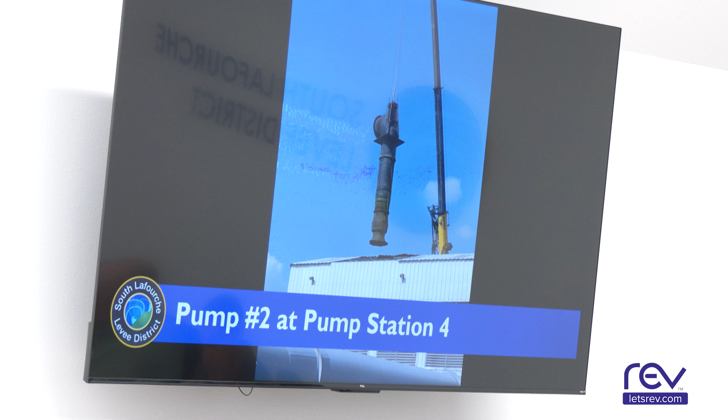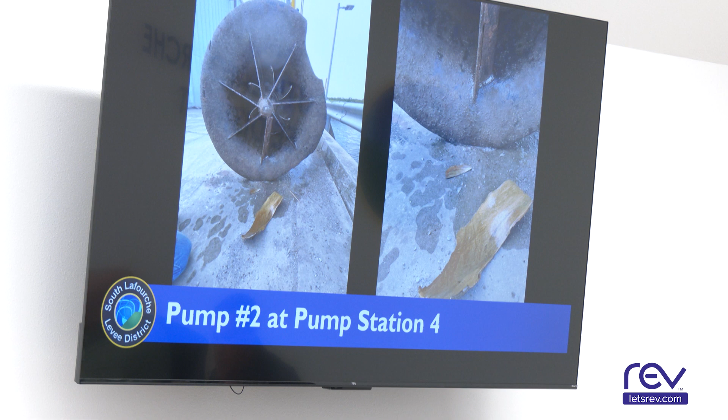All right, first up, pump number 2 at pump station number 4. At the end of October, we noticed some issues with operation at pump number 2. We pulled the pump on October 29th. You can see here it being pulled through the roof with a crane. Bolin Marine then stripped it down to assess the damage to give us a quote for the repair. That quote came back today at $216,335. You should have that quote in your packets, with an estimated time of 5 to 6 months to get it repaired and reinstalled. So that should put us right on track to have it back for hurricane season.

Part of that proposal will include creating a template for a new cast suction bowl to be stored at Bolin's shop in New Orleans for future repairs, because multiple pumps at pump station number 4 as well as pump station number 7 would all use that same mold in the future. So that'd be part of this packet. The alternative would be purchasing a new pump. Reached out to Picciola and Associates for recent quotes, and it looks like it'd be around $500,000 plus a 10 to 11 month lead time, which would put us one pump short all through hurricane season.

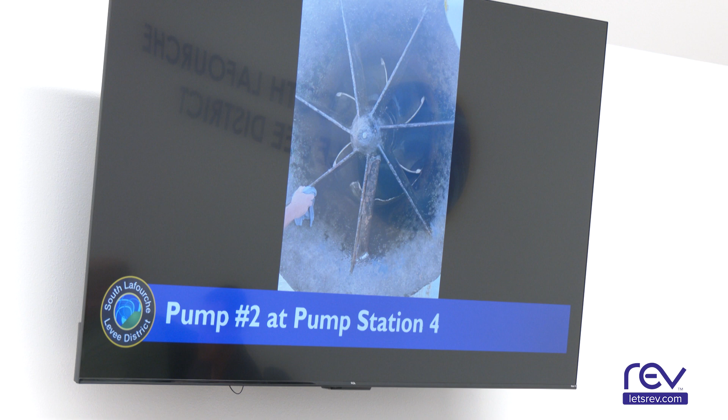So I would recommend that instead of purchasing a new pump, the board approve the cost of the repair at $216,335, since it's above my and the president's authorization to do so. Okay, you've heard the recommendation of our general manager to get the pump repaired by Bolin at a cost of $216,335. Moved by Mitch, second by Brett, all in favor? Aye. Opposed? Motion passed.

All right, next up, the semi-quantitative risk assessment. So this is part of the recertification efforts that the Corps is doing to get us back into their rehabilitation and inspection program. A team of risk analysts from the Corps of Engineers met in New Orleans from October 16th through the 23rd. This is the same team that had previously come to inspect our system in person at the end of August. So this was the next step of that process. They worked through over 30 different ways that our levees could possibly fail over that week.

That included obviously overtopping, which would be thought to be the most common. What would happen if every one of our pumps would simultaneously fail? What would happen if we'd have a barge hitting the levee? What kind of damage would that do, and would we fail in that storm? Even to, what if we had an earthquake in South Louisiana? What would that do to our levee system?

And specific anomalies to our system, like the new elevated highway going across our levee. What would happen if that bridge would collapse and fall on our levee? Now not only would that bridge have to fall on our levee, but it would also have to fall in a short enough time before a 100-year storm that we wouldn't be able to repair or put any kind of emergency protection in place.

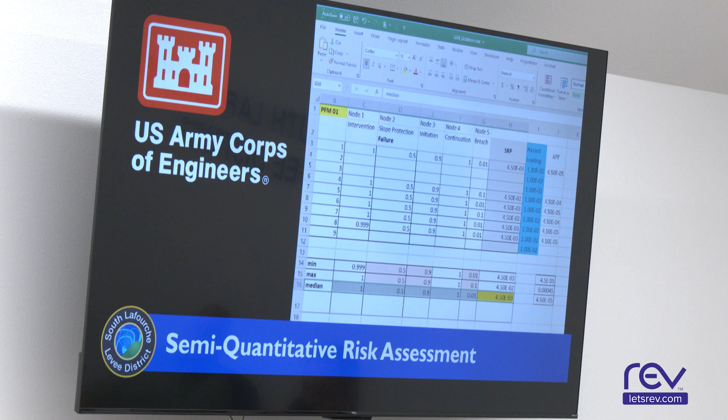All right. So next, recent rainfall and high water. So around October 30th, we started to see water getting higher in the Intracoastal with Rafael in the Gulf, and I know we saw Grand Isle had a lot of water in the area around that time. Even though it was going towards southern Mexico, we saw this earlier in June with the system that was heading towards Mexico, and we saw high water. So the water stayed high, kept climbing. Eventually we had to shut the screw gate on the culvert at the Delta Farm wall, which just caused the Delta Farm Road to flood sooner.

And that eventually led to a 1.5 to 2 foot differential between the Intracoastal and the bayou south of the Ted Gisclair floodgate in Larose. And so with that, we ended up having to go down to one opening per day, siphoning at pump station number 4 the rest of the day to keep water levels down. And we do have a video that our operations manager, Drake, took at the Larose floodgate showing the water coming through. And this was one vessel trying to get through against that 1.5 to 2 foot differential.

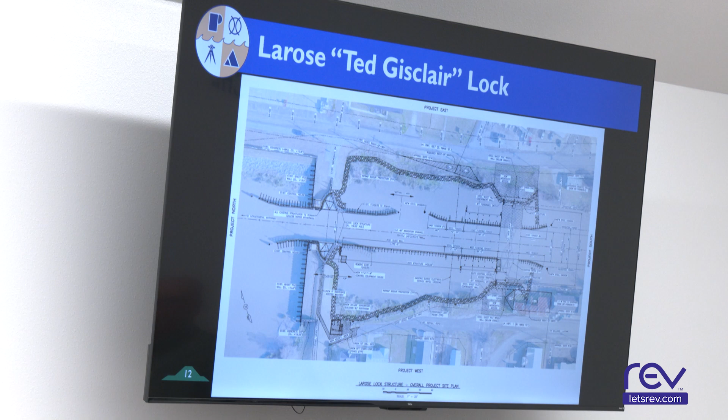Mark, Picciola and Associates. First project is the Larose Lock. Project plans and specifications are 95% complete. All permitting is complete, and we are now working on hydraulic modeling of the area for the submittal to FEMA and preparing the final plans and specifications for issue for bid set.

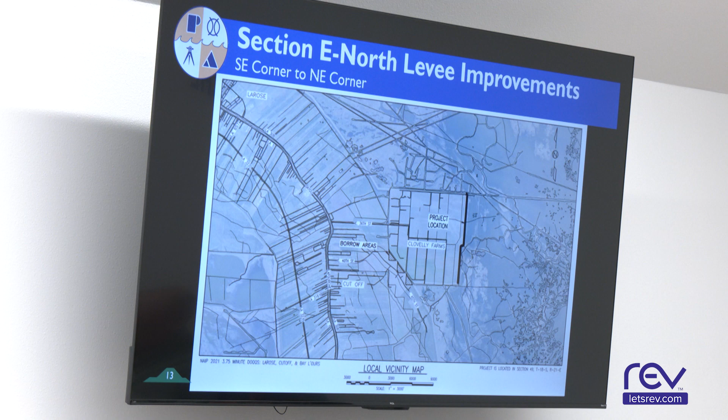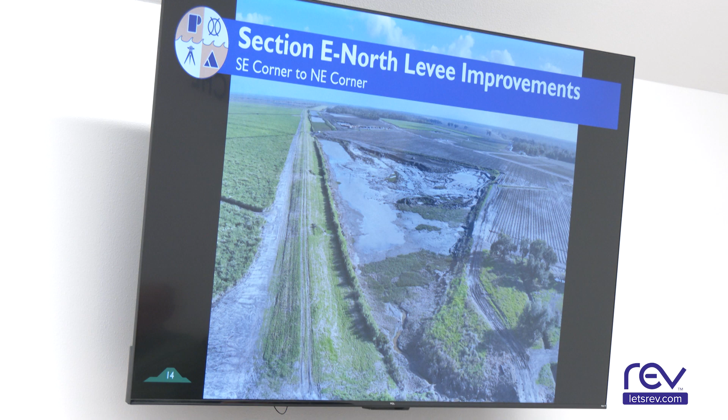The next project is Section E North levee improvements, southeast corner to northeast corner. Construction Site Specialties is the contractor. The notice to proceed was issued on June 19, 2023. The contractor is currently on site moving material. They made a lot of progress last month, and they continue to make progress as long as the weather permits. Construction Site Specialties has submitted pay application number 10 in the amount of $592,422.61 for your approval.

Okay, gentlemen, we've heard the recommendation of our engineer to pay Construction Site Specialties pay application number 10, amount of $592,422.61. Moved by Brett, second by Mr. Rowland. All in favor? Aye. Opposed?

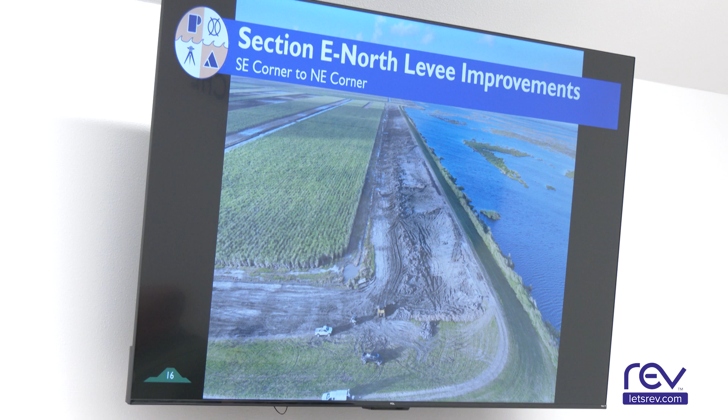Campo and Sons is also on site. They're grading and shaping material that's been placed on the berm into the levee template, and they have submitted pay application number 1 in the amount of $28,192.50, and we recommend approval. Okay, you heard the recommendation of engineer to pay Campo the sum of $28,192.50. Moved by Mitch, second by Matt, all in favor? Aye. Opposed? Motion passed.

The next project is Section A East levee improvements. Project plans and specifications are complete. They have been submitted to CPRA and they have approved them. We have also submitted those to the U.S. Army Corps of Engineers for Section 408 permit review, and we're currently working on scheduling a meeting with them to discuss the 408 permit. Oh, we got a permit.

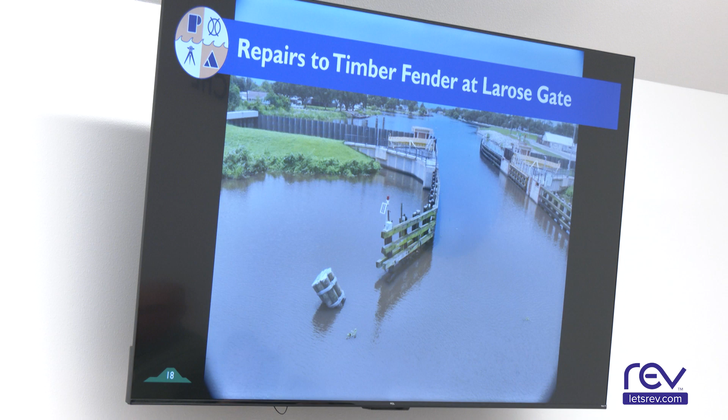The next project is repairs to the timber fender at the Larose floodgate. Project plans are complete. Crosby has ordered the material and is expected to move on site in the upcoming weeks. And the final project is the emergency gate closure at the Larose floodgate. Project plans are complete. We are currently soliciting bids from several contractors and will receive them on November 21st at 10 a.m. Any questions? Okay, any questions for Mark?

Thank you, Mark. Okay, moving on, GIS.

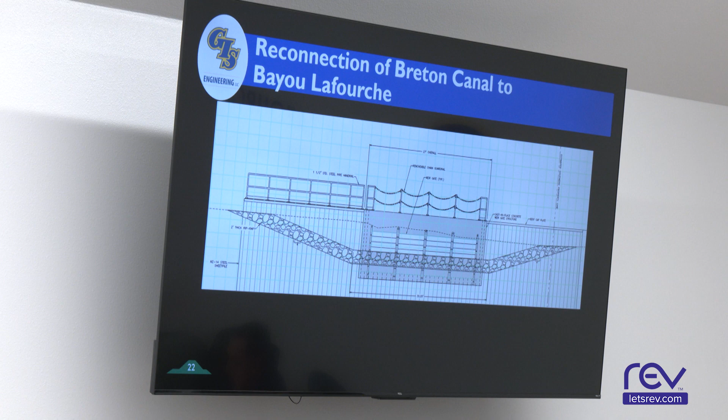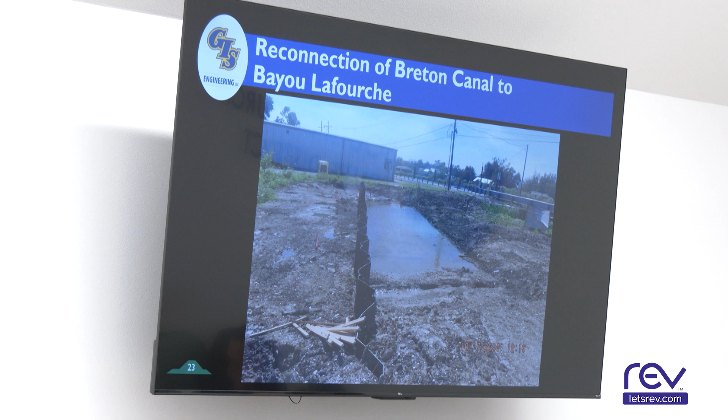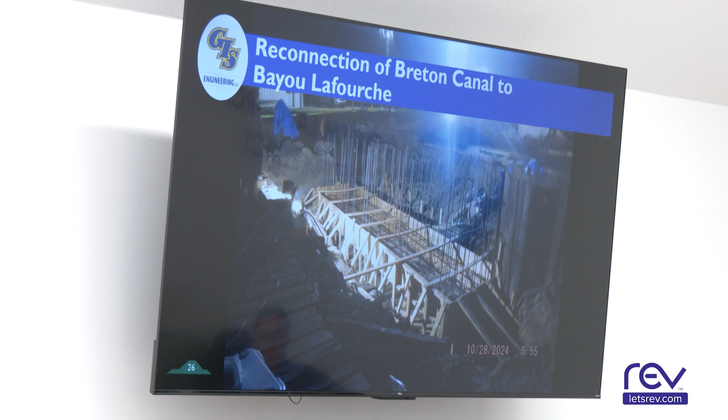Next project is the Breton Canal. So that project, the contractor is working. They're getting very close to having the structure in place. They should have the concrete poured. As you can see, all the sheet piles are in place. They should have everything on site minus the actual gates and the electrical work done by the end of this month. And then they're going to partially demobilize from the site because the gates aren't anticipated to be in until end of January, early February of next year. But once they do get those gates in place, they anticipate 2 weeks and they'll have them done. And that'll be the final step? Yes, sir.

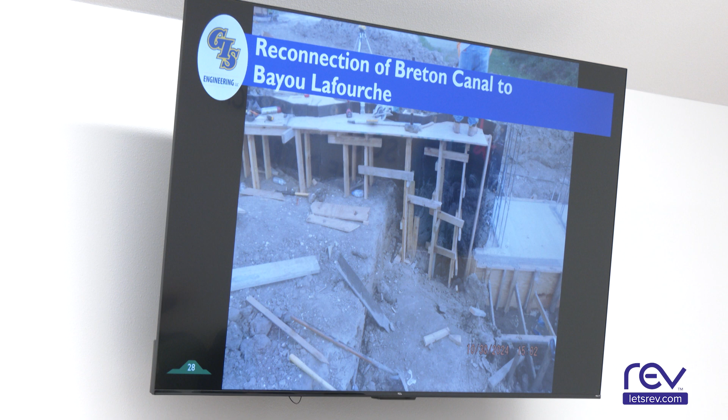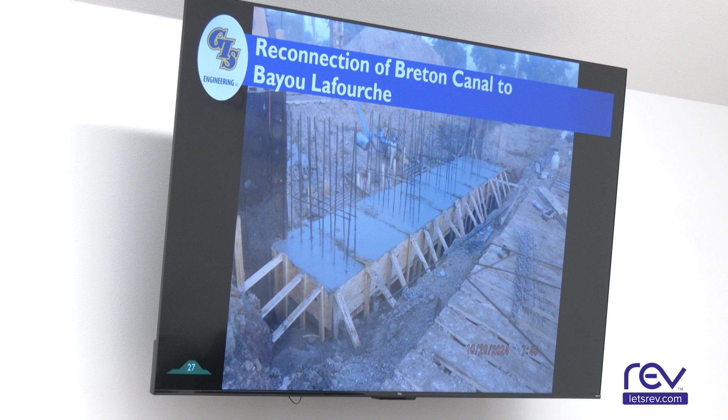So most likely our intent is they're going to request a partial substantial completion for the site work, and we'll do an inspection sometime in early December, and then we'll wait until the gates are installed and do the full final acceptance of the project. And we did have a pay app for this contractor, Gordon Environmental, in the amount of $24,907.58, and we have reviewed that and do recommend that. All right, you've heard the recommendation of engineer to pay Gordon Environmental $24,907.58. Moved by Scott, second by Gavin, all in favor? Aye. Opposed? Motion carried.

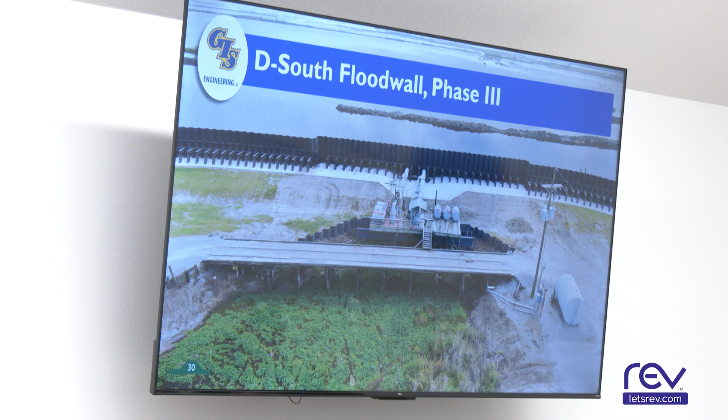And the last project is the D-South flood wall at the Crawfish Farm. So this is the Phase 3 improvements. We had the pre-construction meeting with the contractor, which is Sea Level Construction. We had that last week. They are going to start procuring materials and getting everything ready, but they don't plan to actually mobilize out there until the new year, sometime early January. But that's all built into their schedule, and that should fall within their contract time. So there's no issue with that. Any questions? All right, thank you all.

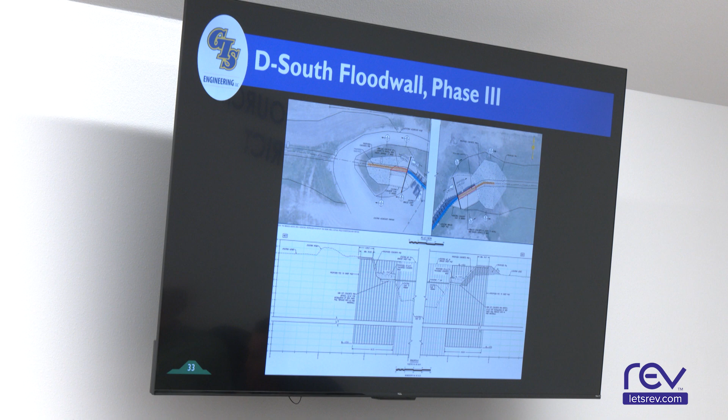All right, on the C North Levee area, we've got a couple of things going on there. The contractor working on the emergency repair was Compo and Sons. He completed that work last month. That's where the levee meets Highway 3235 along Highway 24. We're recommending approval of his invoice number 1321 in the amount of

$14,068.19 for that work. Okay, you've heard the recommendation of engineer, pay invoice 1321 to Compo and Sons. Moved by Bonnie, second by Mitch, all in favor? Aye. Opposed? Motion carried. All right, also on C North, the contractor, Compo and Sons, is finalizing some stockpile reshaping

to dress off a small segment of that levee section. This is just a partial invoice for the work he's working on, but invoice number 1334 in the amount of $2,205, we're recommending payment. Okay, you've heard the recommendation of engineer, pay invoice 1334, amount of $2,205. Moved by Matt, second by Mitch, all in favor?

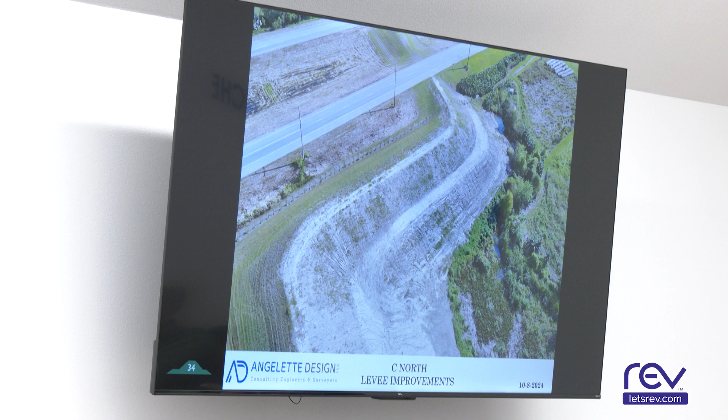Aye. Opposed? Motion passed. Okay, moving on to section C South. Again, we have Compo and Sons working on the project to improve that protected side slope. We're recommending approval of his invoice number 1336 in the amount of $22,532.50 for this work. All right, you've heard the recommendation of engineer, pay invoice 1336, amount of $22,532.50 to Compo and Sons.

Moved by Mitch, second by Gavin, all in favor? Aye. Opposed? Passed. All right, we also have same contractor, Compo and Sons, doing some reshaping on an area behind the shooting range. His invoice number 1337 in the amount of $4,235 is being submitted. We recommend approval.

Okay, recommendation of engineer, pay Compo and Sons, invoice 1339. 37. 37, I'm sorry. Moved by Brett, second by Mr. Rowland. All in favor? Aye. Opposed? Motion passed. Okay, and last on that section, work is being completed for the flood side toe repairs.

You can see some of that on the left side of the picture here. Compo and Sons was the contractor. His invoice number 1339 in the amount of $76,702.50, and we recommend payment. Okay, the recommendation of engineer to pay Compo and Sons invoice 1339, $76,702.50. Moved by Mitch, second by Scott. All in favor? Aye. Opposed?

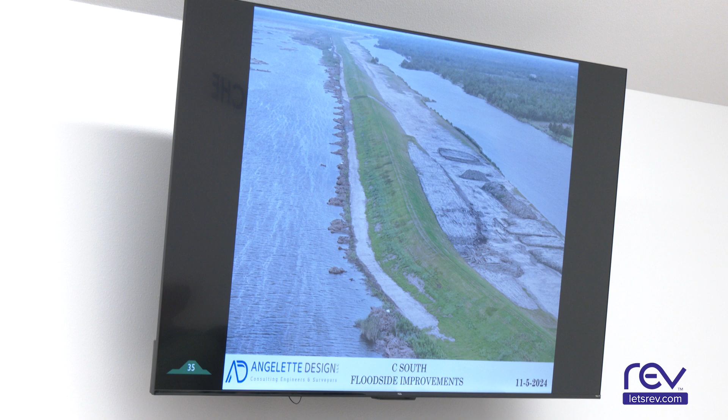Motion carried. Okay. Moving south of this area on the B North levee segment, this is south of the Basin Pump Station. We have a contractor, New Gym Construction LLC, working on the protected side berm, doing improvements there. We recommend approval of his invoice number 1041 in the amount of $33,735. Who's the contractor? That's Nick Walker. What is his company? Okay. Yeah, that's his company name.

New Gym? The recommendation of engineer to pay Nick Walker Construction, invoice 1041, in the amount of $33,735. Moved by Monty, second by Mitch, all in favor? Aye. Opposed? It's just some reshaping? It's some maintenance work, yeah, some levee material we had stockpiled previously that internally our guys had pulled up from the canal.

And now that's one of our sections of levee that's the steepest. And so we're looking to just slope it out a little bit. Okay. Trying to get it back to grade, just some areas that had different settlement subsidence and reshaping it so it can be maintained better. Thank you. We're looking at a lot of extra material for future use right there, right? There is, yeah. And we're gonna need it. Especially along this section.

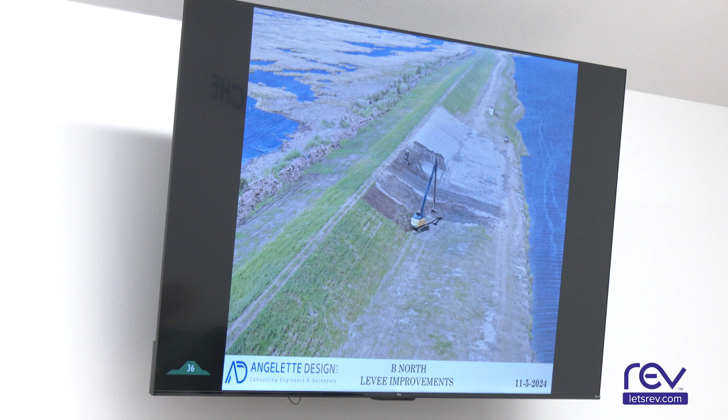The last section is section F. This is on the northeast side, behind Delta Farm. That contractor is Sea Level Construction. They have completed all the work on the project to improve the protected side berm. We have a couple of items today for your consideration. The first one is approval of substantial completion as of October 4th, 2024.

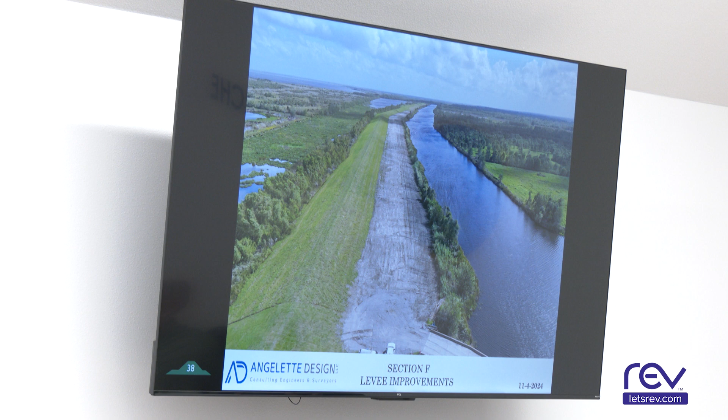Yes, sir. Recommendation from our engineer to accept the certificate of substantial completion. Moved by Matt, seconded by Scott. All in favor? Aye. Opposed? Okay, next item on that same levee section, same contract, is change order number 3. This is a deduct change order, and also some weather days.

We have a deduct of 5,919 cubic yards at the contract price of $20.20 a yard, for a total deduct of $119,563.80, and also 42 weather days that we're recommending for the project. We do recommend approval of that change order number 3. So this is money coming back to the district, or that we thought we'd have to spend that we don't have to spend. All right, the recommendation of engineer to accept the balancing change order, number 3. Moved by Gavin, seconded by Mitch. All in favor? Aye. Opposed?

And then last on this project, we have Sea Level application for payment number 13 for Section F in the amount of $31,893.78. Okay, on the recommendation of our engineer, pay application 13, amount of $31,893.78 to Sea Level. Moved by Matt, seconded by Mr. Rowland. All in favor? Aye. Opposed? Motion passed.

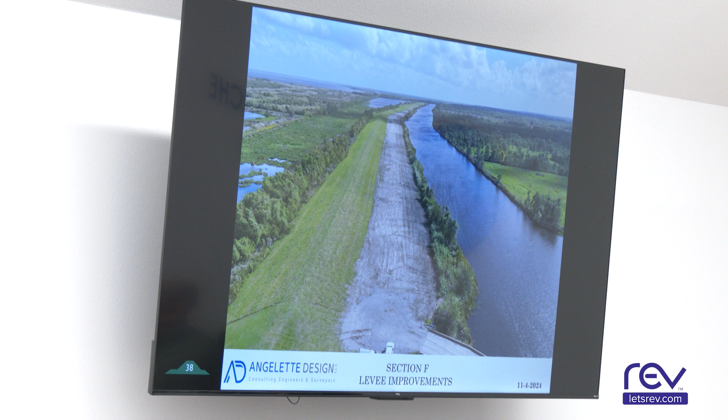Delta Coast, from Delta Coast. Also, Melanie Caillouette with All South Consulting Engineers. Our first project that we have is the Reach K Terraces. This was some damage that was done by Hurricane Barry. The terraces are now complete. We completed them right after Hurricane Francine. And so at this point, it's just paperwork that's outstanding. The Terrebonne Levee District has to send invoices. Y'all pay them and then send it over to FEMA. It's a whole big old fluffle.

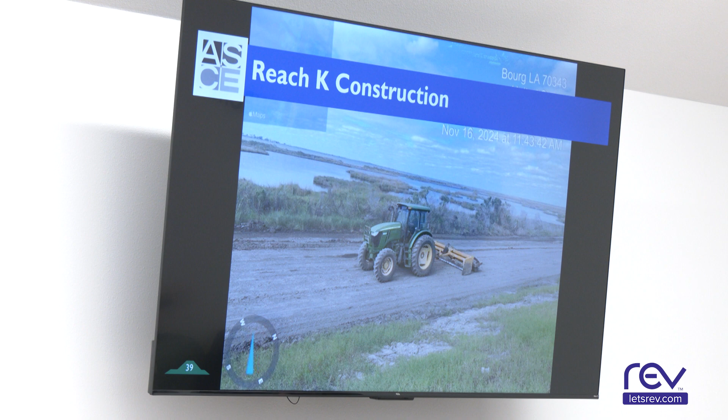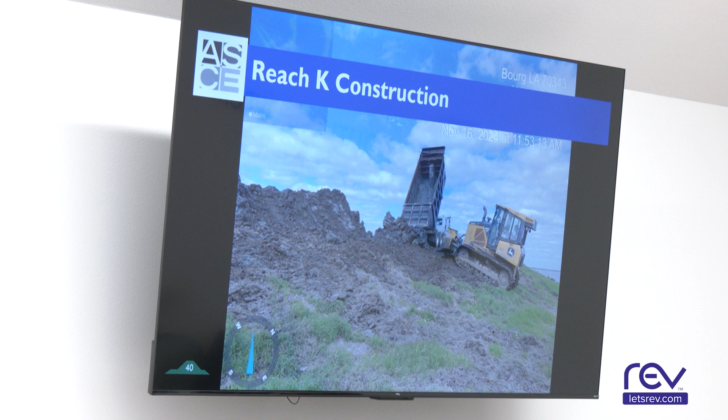On Reach K Levee South, this is south of the first water control structure, that is completed to a +11. And there's no additional work going on in that area, with the exception of continuing maintenance on the haul road, because we are using that haul road to get to the Reach K Center section, which is what's pictured here. So the center section is between the two water control structures. The north water control structure is right around station 208. And right now we have gotten all the way down to station 180 to a +11.

As you work your way south, we have most areas at or close to a +9, and that was something that we did in preparation for Hurricane Francine. And we're going to continue working from the north going south, bringing it up to a +11. So we're still working on that right now.

This is a section that is difficult to work in because it was not a very compacted area. And so as soon as we put material on it and started running trucks on it and working it, it just sinks and goes away. So it's a constant battle trying to gain elevation in that area, but Terrebonne Levee District is constantly adding more material to our contract, and we're just going to keep putting more material until we get to that +11. And that's all I have on my status report. Any questions? Thank you. Thank you.

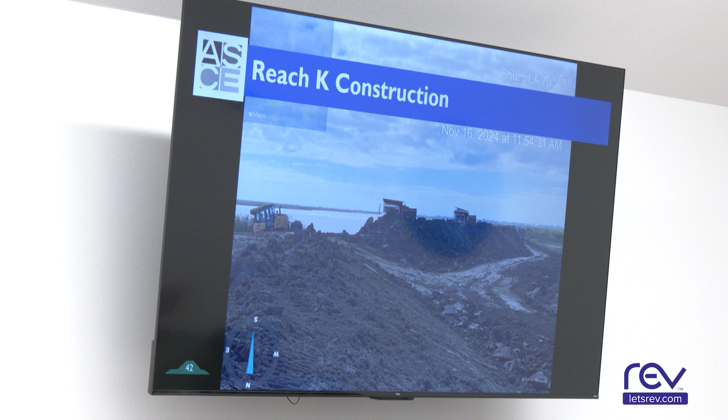Okay, legal permits applied for, Mitch. No permits this month. Oh, cool. Holiday time. Mr. Board Attorney, just no? Quick. All right, Finance Committee, Mike. Okay, Mr. President, the Finance Committee met at the first meeting, reviewed all invoices, and recommended they be paid as presented. Good recommendation from our finance chair, to pay all our invoices. Moved by Mike, second by Scott, all in favor? Aye. Opposed? Motion passed.

Personnel Committee. Okay, Mr. President, in the packet, everybody received a copy of the revision to the personnel manual. It specifies how the annual cost of living increase will be paid. Basically, a 2% cost of living will be granted every year, and the rest of it will be based on the employee performances. So hopefully we develop a culture where employees get rewarded for a job well done. So the committee recommends the board accept the additional wording. And like I said, if you have any questions, this looks like this in your packet. Okay? So we're looking for our board acceptance.

Okay, you got a recommendation from the personnel chair to accept the new revised evaluations. Moved by Gavin, second by Mitch. All in favor? Aye. Opposed? Motion passed. Also, the committee reviewed applications for the mobile equipment operator #1 position, and we'll be notifying applicants tomorrow. You skipped that. Which one? Employee performance evaluations, approval of referendums. Oh, yeah, no, I had it last quarter. I reversed it. It's coming next, okay.